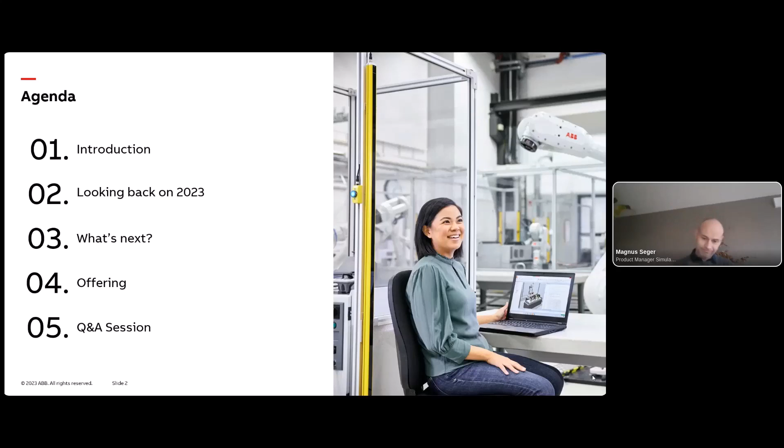So, first thing, introduction. I'll start with this one because this describes pretty well where we are today. We all know that the world is a bit upside down and a lot of crises are happening. There's a supply chain crisis, there could be a pandemic, and we work in different ways. We work worldwide spread, we sit home, we have to adapt our production equipment to meet all these new things. We have to be so flexible that we can switch from one product to another quite rapidly. And we have to be prepared for this.

We always talk about these high mix, low volume things. And of course, that's why robots come into play. Robots are ideal for this. And we're pretty good at robots, but we're even better at robot programming, how we can make them do the stuff that we actually want them to do. It makes no sense to go down using a joystick and teach the robot. The robot should produce. And that's where RobotStudio really makes the difference. We can really make sure that you get efficient by doing this.

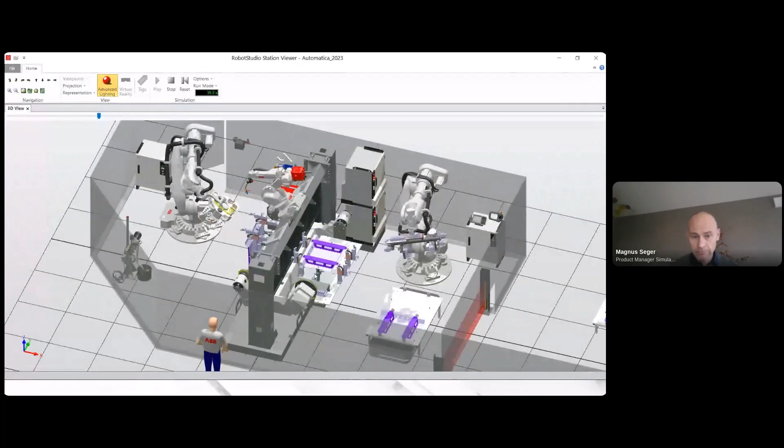And let me show you, this is really how we think about RobotStudio. The tool where you can program, you can simulate everything with precision, in detail. It's not only about the robot motion, it's also about the configuration, the handshake, the IOs, the safety. You spend more and more time doing safety configuration. But we also have the PLC, the MES SCADA system, and everything that an automation cell needs. And this is really what you can expect from RobotStudio.

Of course, you do the pre-studies, you do the offline programming, and what you see here is really what you get. That's the beauty, of course, and that's the best investment that you can do. But on the other hand, when you have an existing production, you don't want to stop that to make some adjustments, to tune or to optimize it. Instead, go to RobotStudio, do that, test everything while the robot is producing without disturbing the ongoing production, and then deploy these changes down to the robot.

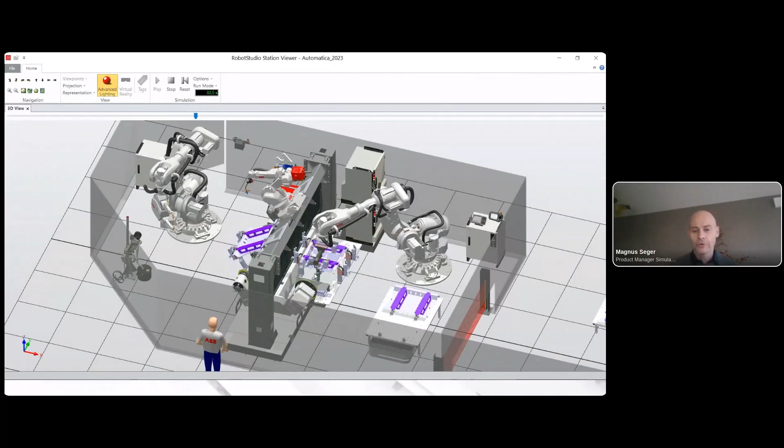And it's really all because of this. Our little guy here, the virtual robot controller, is why we can give you these types of guarantees, because this one, which is the true digital replica of the real robot software that runs down on the shop floor, guarantees that the things that you see here on the screen will be identical to the things that happen down at the shop floor. It's as simple as that. You can try everything, you test different configurations, and it will be the same. You can trust the result.

And it goes for the motion, the trajectories, the cycle time, the behavior, but also the errors. And you should really love to have the errors here, sitting with your PC, sipping your coffee in a warm office, not down next to the robot. Because there you make the bad calls, the bad decisions. You just want to get the robot working, not doing the right stuff. So I think that is the strength of RobotStudio, and I will come back to this over and over again, the virtual robot controller.

Okay, so that was pretty much the introduction. Our virtual controller is the DNA of RobotStudio, and that's what makes it different compared to other simulation software that might look good, but can you really trust them?

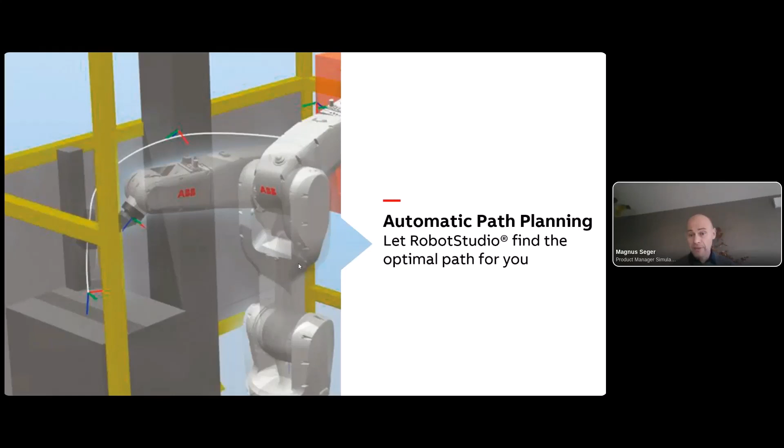We have released a lot of things during this year, some big things, and one of the top things, which is one of the biggest things that we released ever, is this automatic path planning. This is a fantastic thing that could really help you to create an optimal robot program.

In a tight, cluttered environment in an automation cell, it's really hard to create a program. You can do it, but are you really sure that's the optimal one? You create one, but is it the best? Instead, why not let RobotStudio do that for you? And it's just that easy. You just tell the starting point and position, and RobotStudio will find the optimal path for you.

And I will do some demos, of course. I've shown these before, but I think it's extremely visible to show what it's all about. In this case, we have this standard ABB cell. You can see how the robot moves. It moves kind of linear. That's how people think. Point to point, kind of jerky, stop positions, almost fine points, and move linear. And as you can see, this transportation took like 3.2 seconds.

When we took this cell and ran it in RobotStudio with automatic path planning, we got a completely different result and a completely different movement of the robot. By just using the automatic path planning, we could decrease the cycle time by 50%. And the beauty is when you have this highly time-efficient path, the energy consumption will also be reduced quite dramatically. So in this case, we reduce the cycle time by 50%, but we also reduce the energy consumption by up to 30%.

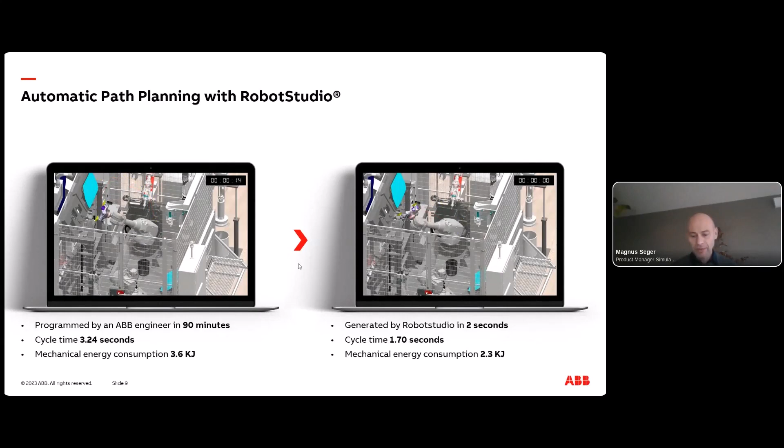And this transportation is one of 15 in this cell. So you can think about cutting that cycle time by half. There are a lot more parts that can be produced in this cell. So the beauty with this one is that you actually just tell the robot what to do, and RobotStudio will create a smooth, collision-free, singularity-free path for you.

And you really don't have to be an expert. It's that easy. Even if you're a new beginner in robotics, you will get the perfect optimal path. And the result will be smooth, with faster motion time. And thanks to this time-efficient path, the energy consumption will also be reduced.

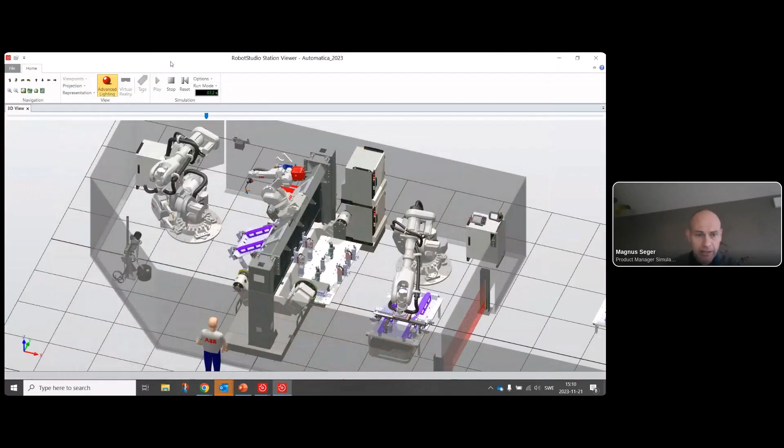So I will do a demo now. Enough talking. I will bring up a cell, not this one, another one, and show how easy and how powerful it is. So here we have a pick and place cell, a machine tending cell, where I will actually run this one because this is the baseline we'll start comparing against.

So the robot goes down to the bin, picks a part, and goes down to the tray. It's just the via points that I show now, so no picking whatsoever. And you can see we end up at like 5.2 seconds. And you can see here when I run it again, the robot moves kind of jerky. It's a lot of stop points, fine points, accelerate, stop. That's pretty much how a lot of robot programs are done today.

Instead, when using our new automatic path planning, we don't really go into details of how. We really tell what to do, not how. So let me show you how easy and how powerful it is. So I bring up this collision-free path, and we now just specify, instead of doing it in a robot program, we just set up the sequence.

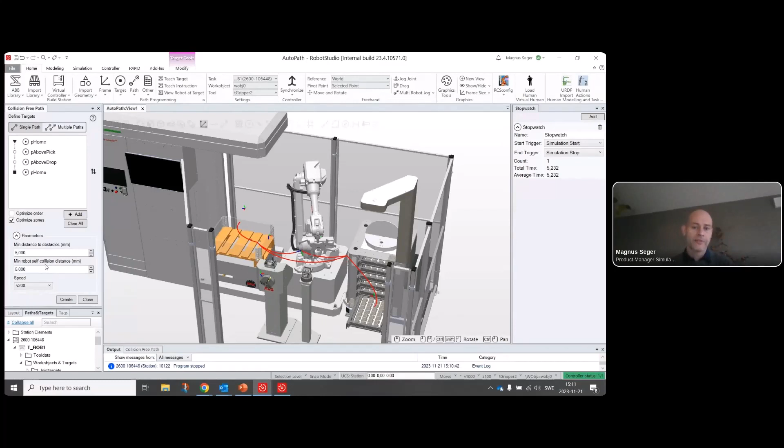So I just press add, and I say start from the home pose, go to the pick, go to the drop, and then go to the home pose again. And you can see we have created the sequence that the robot should do. I add some optimized zones. There are some other parameters you can work with, such as clearance to certain objects, and so forth. I will use the same speed as I had in the example shown before. That's the highest speed, so we can compare the cycle time between them.

And then I press create. So now we start calculating. Now we start finding this optimal path. And boom, we are done. So it's fast, it's efficient. And that is something that we'll spend a lot of time on during this year. A lot of things under the hood with automatic path planning to find a faster, better path in a shorter time.

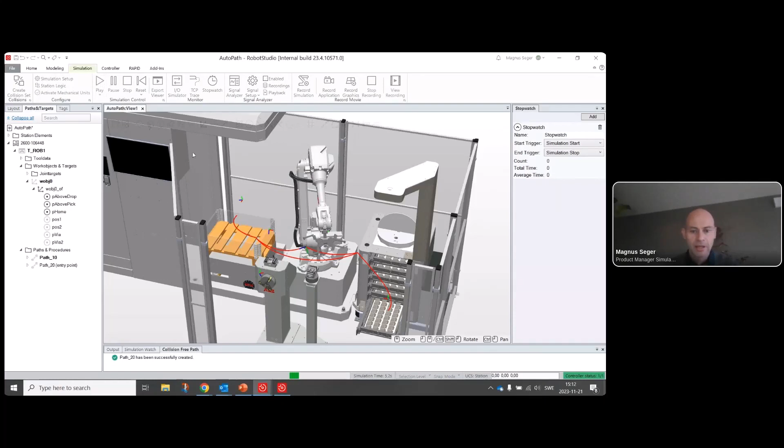And remember the cycle time that we had before, 5.2 seconds. I press play. And now you can see the robot takes a completely different track and ends up with 2.8 seconds instead. Almost a reduction of 50%. And you saw how fast, and I talked a lot in between, but you saw how fast you can create this program. And you also see how much smoother the robot moves.

So it's not only that we reduce the cycle time, we also reduce a little bit of the wear of the robot because it moves much smoother. And down here we can see we have brought up a new panel, the collision-free path output. I will come back to this one, but remember that one, because this is where you get some debug information later on as well when things don't really get what they expect or when you get collisions and so forth.

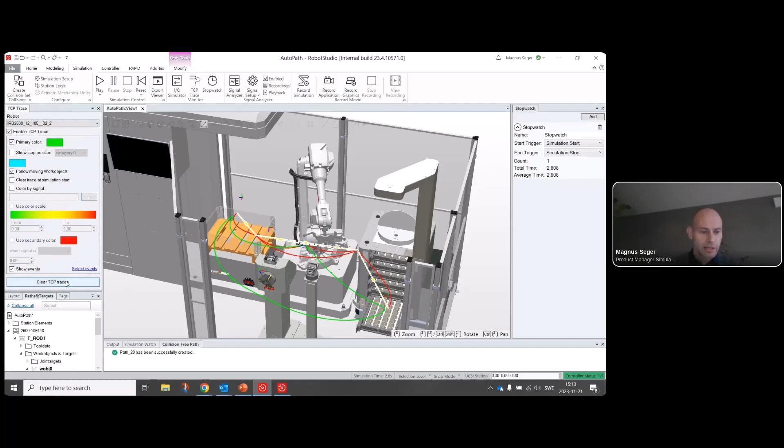Okay, so we reduced that pretty much by half. But let's have a look at the energy consumption as well. So I will activate the original path first. I will actually clear the traces and turn them up. So I will do it like this, and I will open up the signal analyzer. And first I will start with the signal setup, so we subscribe to the right signals.

I hope that you guys have actually used the signal analyzer. That's one of the most powerful things we have in RobotStudio, to be able to subscribe and search on all different types of signals that come from the robot to get some insights into how the robot behaves. In this case, I check the energy consumption. And I bring up the signal analyzer. I will just put it like this. And I press play. And now we run the original program.

So it moves, ends in 5.2 seconds with around 8,500 joules of consumption. Now I switch to the new one, press play on that. Instead, the robot swings around, ending up in 2.8 seconds and around 7,500 joules, meaning that we have decreased energy consumption by around 1,000 joules in this short time period without doing any specific optimization.

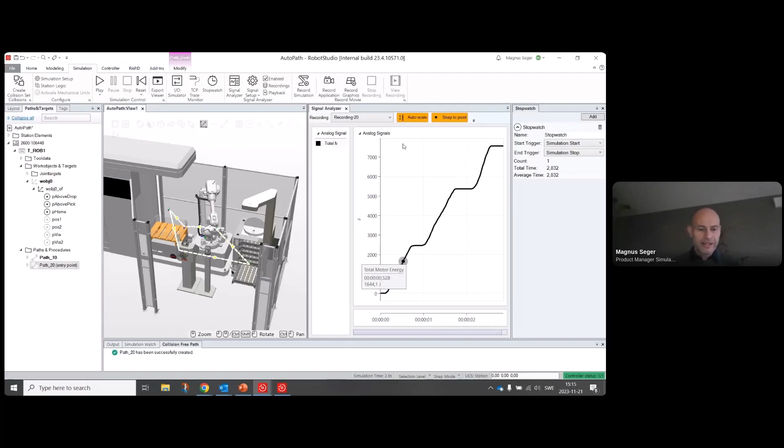So you see how easy, how powerful it is, and how amazing the result is when you see this collision-free or automatic path planning functionality. There are a few things, of course, that I just want to show you very quickly. The first thing is about this output that we've added. We have been working a lot with the collision geometries, because this is really the thing: how to create the collision geometries as effective as needed, and also keep them not so complex, so we can calculate as fast as possible with them.

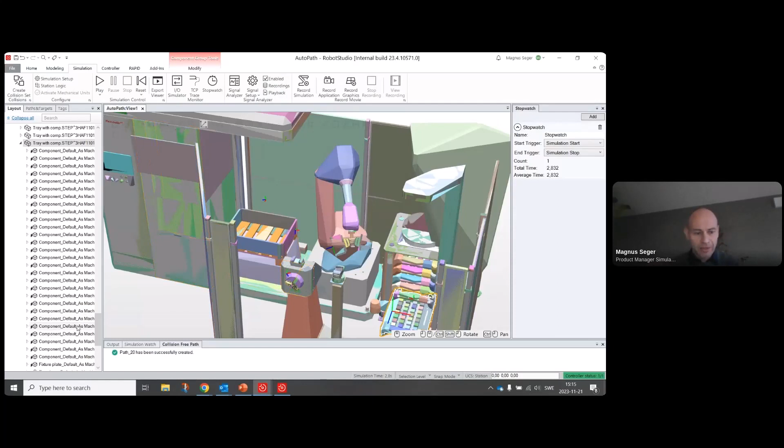But the thing is that you can change it, you can get some information, and you can also test it, because in some areas we try to keep coarse, not so accurate models to calculate, but in some areas you need more accuracy, and then you can switch to these different levels. And when you really need the preciseness, you have to customize, and you can really slice it into more precise convex hulls. So just have that in the back of your head, but the more interesting thing is of course the result, how easily you can cut the cycle time and the energy consumption.

Okay, switching back to the presentation, and I will just bring that up again. So that was one of the top things that we have released this year. Another extremely cool thing is that we brought virtual or digital robotics into the cloud. We released that almost exactly a year ago, end of December last year, and we've improved a lot and we're working a lot. And we see this still as one of the true enablers, one of the platforms for the future.

And as I said in the beginning, we are more and more working distributed. Our colleagues sit at home, some sit at the office, and you guys work in big companies and you have customers worldwide. We all need this possibility to collaborate smoother. And when we collaborate, there's also a risk of how to keep track of the different things happening to these projects, and that's about version control, about traceability. So RobotStudio Cloud enables this possibility to collaborate in a team, but also to keep track of all the different changes that people are making while working in the project.

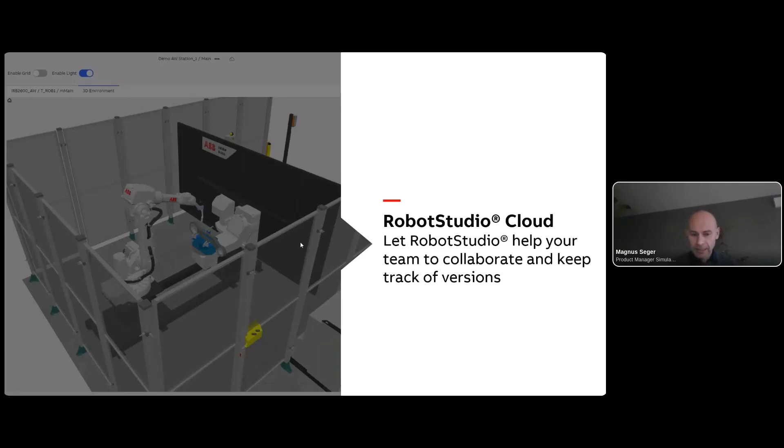And you can either decide if you want to use the desktop product, this one, or you can use the web-based application, RobotStudio Cloud, we call it. It really depends on the use case, but you pick the tools you're most familiar with and that solve the task best for you. Right now, a lot of people are using RobotStudio Cloud for version control. They sit in the desktop, but they store the project in the cloud, and the cloud handles keeping track of the different versions.

In the cloud, we have a Git repo, and we have created a powerful user interface on top of it, because version control can be kind of tricky to keep track of these different versions. And then, of course, I can invite others and they can pick up their web application.

We have pretty much the same mindset as Microsoft does, working with OneDrive and a desktop product. When I created this presentation, I did it in PowerPoint desktop. I uploaded it into SharePoint, same thing as we do now, and we can invite others to comment and work together with me, and they can use the web application or the desktop. Pretty much the same thing.

This is maybe the most boring slide, but we have to talk about it, because as soon as we talk about cloud, we talk about cybersecurity. From the very beginning, we designed it to be secure. That was the first thing we did. So we cover everything. The data that you upload into the cloud is personal. We don't share it with any third parties. We don't share it with ourselves. We don't see anything, and it's yours unless you invite someone else.

We're running on Microsoft Azure. It follows all the different standards, the latest security, and we run in Western Europe. And of course, everything's encrypted, everything is audited, and we follow all ABB certificates and procedures that are needed. Of course, GDPR compliant, etc. So we have covered it all for you, but it has to be there, right? So now I leave it, but just so you remember, we take this seriously, really.

Okay, some new cool things that we added during this year. And the first thing that I would like to mention is this possibility to share recordings via the cloud. You remember what we started with was that we had these station viewers first. These big executables that we did from RobotStudio desktop, where we could create a station viewer, a mini RobotStudio that you can send to others, and they can rotate around, which is super slick, super nice.

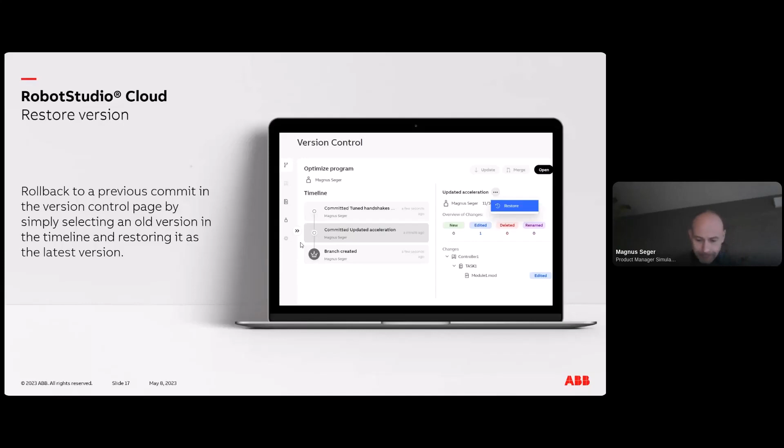And think about that when we move on to the real robots, etc., to be able to restore and roll back to a functional version. So a lot of good things. I will now do a little bit of a demo to show you. For you who haven't seen cloud, and for you who have seen it, we show some of the new cool stuff that we have introduced. Okay, let's jump into the demo mode.

And I have prepared a little bit of a station here. So this is a station that we have. I will select a simple arc-welding station, so I will just run it. And you can already see here that there are some differences. First of all, you can see that I am signed in as myself. And you can see that this station here is connected to the cloud. That means that the storage that I have here is on the cloud.

And you also see the possibility to push commits and push changes to that storage. So that's what we do. I will show you how easy it is. First of all, I will open up my cloud project, just bring that down, I'll open this one. And you can see all my products, and this is my personal space, unless I invite someone. You can see I'm logged in here, and I have my space, I have everything that's needed.

And this was the product that I was using. Here you will also find a lot of tutorials, documentation, etc., on how to use the products. Pretty handy. You see everything you need in the app. Okay, but let's go to this demo. You can see here we have this one, and I can look at the product.

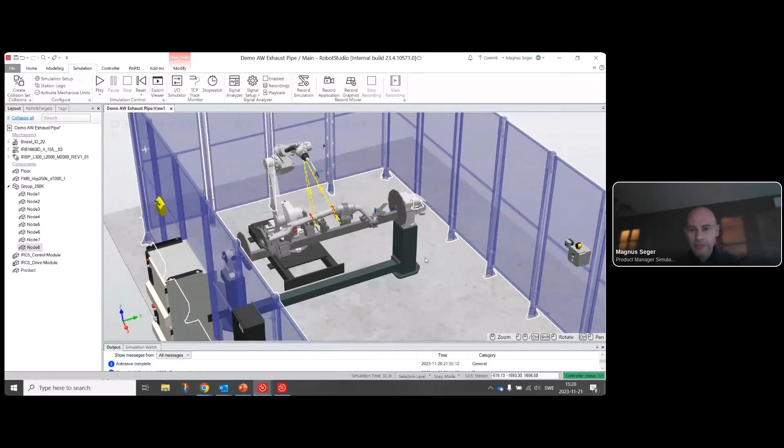I will not do this right now, but it's that simple. Of course, we can open it up, we can run it, and we can do certain things. I will head back to this one and show a little bit when we push changes and when we put them into the version control system, because you can do a lot of things.

Let me introduce a change. I've added a few changes to the Rapid program. I will also add a few things to the scene just to show. For example, I can put a pallet here, and I just press create. So I put the pallet, so we see something that is changing.

I save it, and now I would like to push these changes and store them into version control. So I do a review, and you can see here are my changes that have happened to the station environment, but you can also see you've changed a lot of things to the code. Here you get the source and the target, and you can compare these two versions.

You can see all the changes I have introduced to my program, a lot of cleanup, and I just have to make a comment: I did a cleanup and added a pallet, for example.

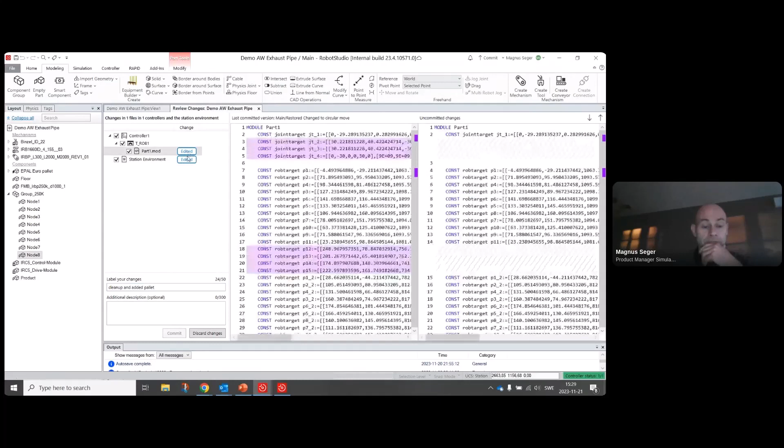That's pretty much it, you can be quite sure this is the thing that's working. I will do that, and now we can push these changes to make the commit. Added stuff, and I make a commit. So now we take the changes, push them up to the version control system, and we have them there.

Everybody working together in this project will get notified, they get synced with these changes if they want to. It takes a little bit of while, but this is how it works. It's kind of handy. This is how we collaborate, this is how we work in a project together. My network connection is a bit slow, but this is how it is.

I'll switch back. And you can see, once it's done, we'll get a new commit and we will get the latest and greatest changes. Of course, we can also open it up. Now I'm pushing up the changes, it's still ongoing, but I will do that just to give you a view of how it looks in this world and what you're capable of doing.

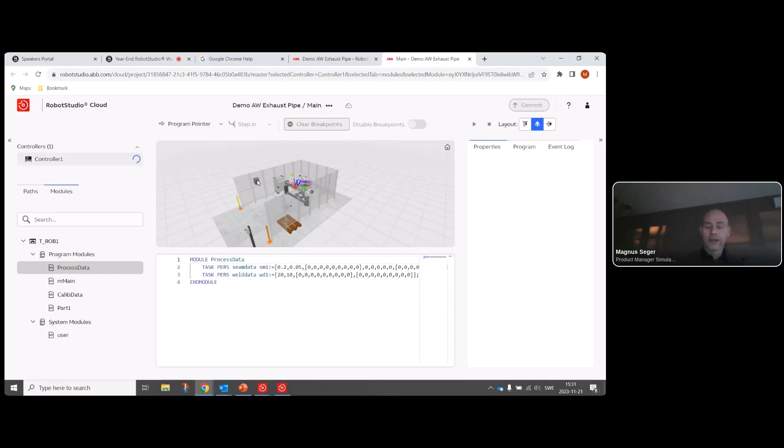You can see the changes, the commit, I will introduce the pallet there as well. The controller is now starting up as well. We have this virtual robot controller in the cloud that is starting up, and that means you can start to simulate, start to test, do everything that is really needed to be able to do this.

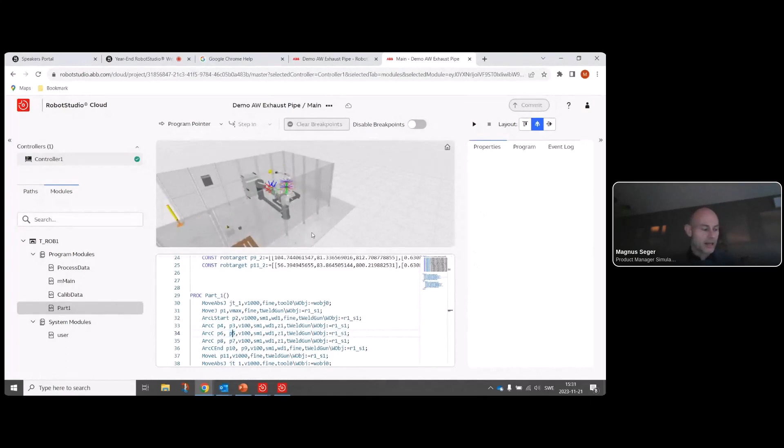Of course you can do changes here as well. You commit them, and when you do that, you will be notified as well down as a user. The controller started, it's starting up. You have the same thing: you can look at the program, you can do changes to your program, you can debug, you can run certain things, and really work in a streamlined way to adjust, work with your product, and tune it.

So I can simulate, I can go through it, I can debug, I can put in breakpoints, etc. A very handy, easy way to do it, and you don't have to have anything installed, you're just running this in the web browser.

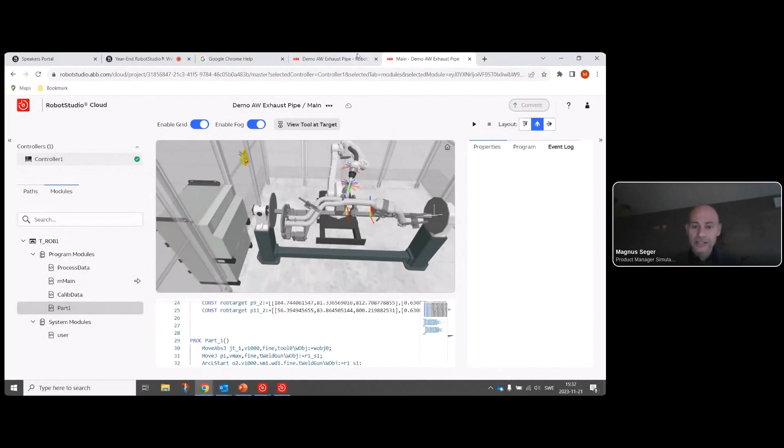Once you're done, you can make some changes, put in some commits, and sync them to everybody. This is one way to keep track of all the changes in your automation product. So this is the commit I did, and you saw I changed a few things. Let's head back to where it was.

Let's close this one. The last thing I'd like to show in the cloud is sharing recordings. We have this simulation, and now there's a new feature called export viewer. I'll press this and store the recording in my cloud storage, and also create a link. This is pretty much a station viewer that we have.

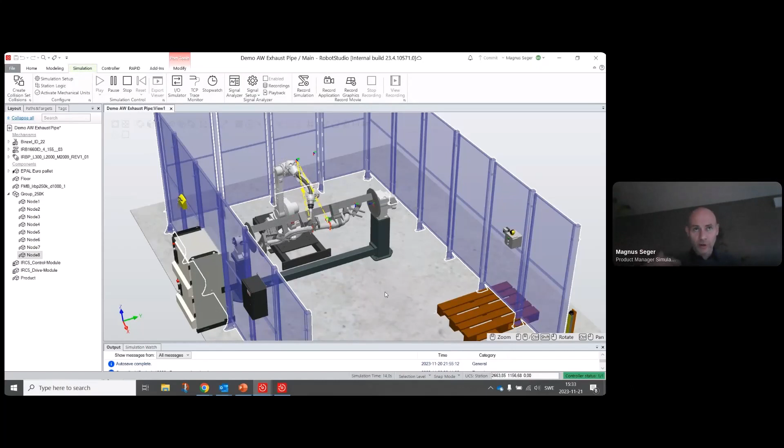Pretty much the same thought process behind this one. So now we run it, we record everything, and once done, we can push that up to the cloud storage. Okay, so now it's done, soon.

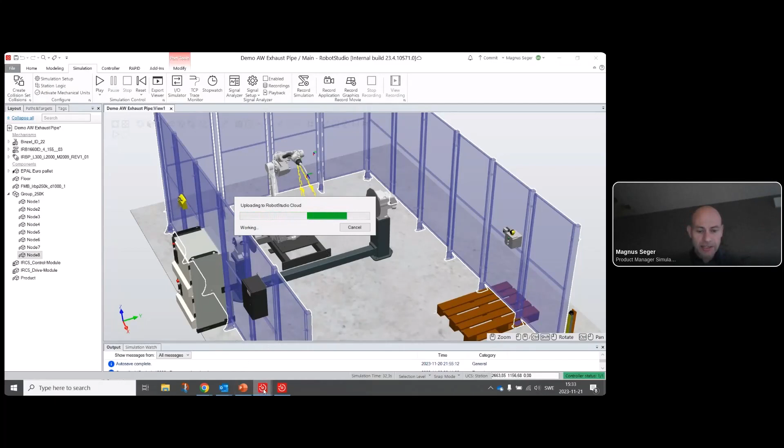I'm creating the viewer, uploading it, storing it in the cloud, and I'll jump to my cloud here. I have to log in again, and you can see here it is. This link is something you can share with others — something you can pick up on a phone, send and distribute to anyone.

You don't really have to have any license or anything like that, so this is pretty straightforward. Just export this viewer, it's stored in the cloud, and you can take this link and send or email it or hand it out to others to give a snapshot of your proposal. Kind of sweet.

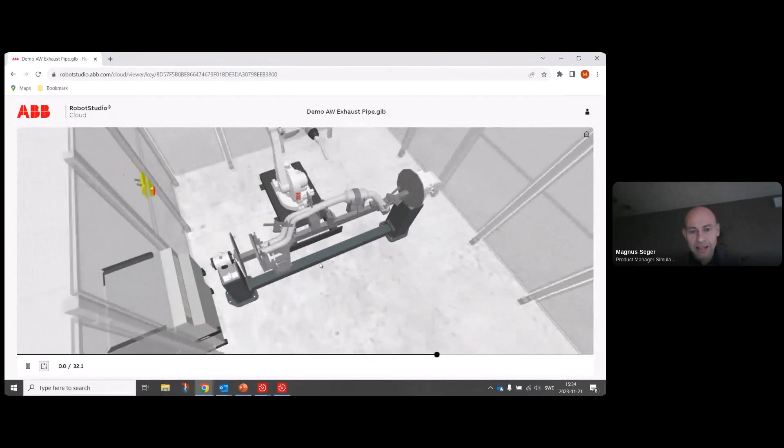There's a lot of good things happening with the cloud, and we're adding more and more capabilities and functionalities into it. We are expanding our ecosystem in this direction. And here you can email it and send it away. So I'll just close this and switch back to my presentation.

These were the two big things we've released so far, and we're continuously working on them. We've done a bunch of other things too, but these were the two main highlights I wanted to share with you. Now let's jump into the next release, which will happen in a month or so, and I'd really love to show you what's next.

You remember I showed you the autopath planning, the collision-free feature. I said we have this output debug window, and now you can see we've included more information into it, because before it was troublesome to figure out where the collisions were happening. We just said there's a collision between this and that — but where is it? Especially you had to see the convex hulls, the swept volume around it, to be able to see that.

But now you can see down here this output window where you can actually highlight, and the robot will jump to where the collision is happening and between which objects, and we outline which part it is. Either you have to make the collision geometry more precise and accurate, or the targets are actually in collision. So this is some sort of guidance to guide you.

This is something I work quite a lot with, together with optimization, speeding up the process, etc. But I can guarantee much more things will come with this automatic path planning during next year. So that was one thing.

And then, of course, we have a bunch of small things that are extremely valuable that we've added. I just cherry-picked a few worth mentioning. First, we've included a search bar in the browser so you can actually find objects in the station — targets or objects that you can search by name.

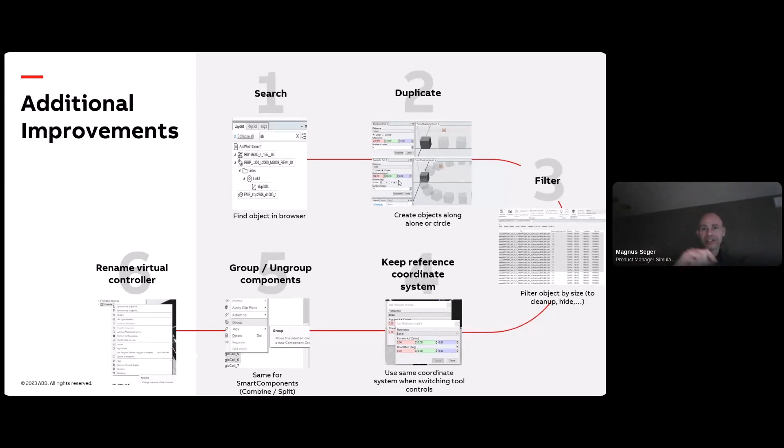Number 4 is my favorite: we're now keeping the reference coordinate system. I've been talking with a lot of people, and they say this is one of the most annoying things we have in RobotStudio. Now we have listened to you guys. We are keeping the reference coordinate system when you're switching selection from one to another. For example, if you have set position and you go from one object to another, or from one target to part, we keep the selections and the reference coordinates we have, so we don't switch to default. Good, finally we have done it.

The 5th thing I'd like to mention is the possibility to group or ungroup components, so you can easily structure a lot of components in a cell by grouping them, but also split them to ungroup, to have a better view, and bring them out and group them accordingly. The same goes for smart components, but there we call it combine and split, so you can group logical components etc. in a better way.

And then we have the possibility to rename a virtual controller, or rename the system actually. This has been kind of challenging - when you run a system from layout, you get a name, and then it says you need to really change it. It's not that easy, you really have to create a new system and make a backup and restore that into it - extremely challenging. But now you can rename it. I will soon demonstrate how easy it is.

And this was just some parts that I just brought up to you, which could hopefully be extremely useful for you guys.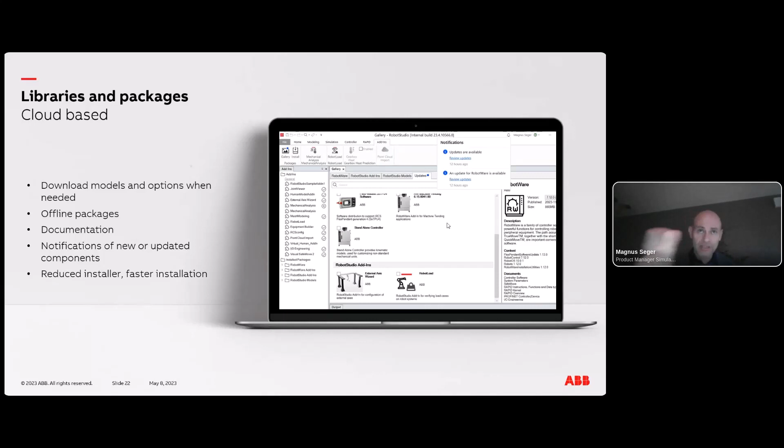Now, one of the big things we've finally added is a new, solid, very powerful gizmo. I mean, you remember we had our little gizmo for a long, long time, but now we finally have one that is worth a tool like this. We've had it for cloud for a while, and now we brought it down to the desktop as well.

Here you easily can manipulate and change the view and scene of your layout. I will do a demo just to show how powerful and how easy it is to use this one. I really love it. This is something we should have had a long, long time ago, but now it's here. So let me jump into that and show you how easy it is to work with it.

So now we are on the 23.4 branch, and there are some new things, and you can see right now I've already started selecting the tool and the gizmo. And you can see we have changed it a bit up here. It's not exactly how it will look. We are still working on the final part, but pretty much the thing is that we have a reference coordinate system and also the pivot point we should rotate around, or what the attachment or selection should be.

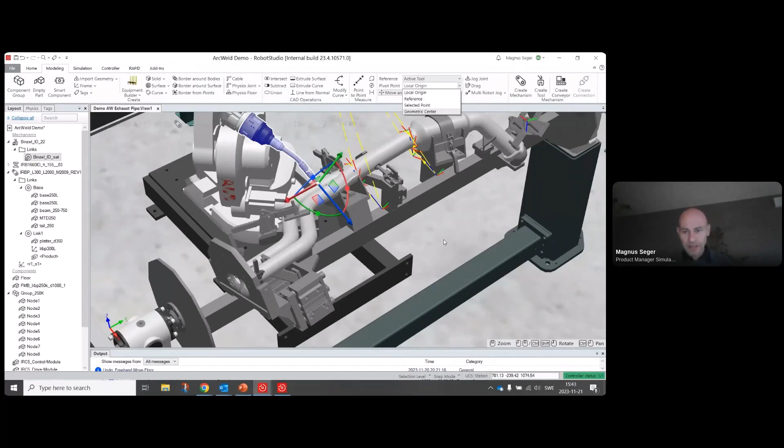So it could be the local origin, it could be the reference coordinate system, a selected point where I click, or the gravity or geometrical center of that object to be able to move this. So I'll try to go through them quite quickly so you get some sort of feeling of where it is. So let me show you here.

So of course you can now drag along the line, and you can see we have a little panel that pops up. So here you can type in, oh, maybe a little bit too much, and you can just adjust it if you want to be more precise, if you don't want to drag it, and you can also select if you want it relative to start or relative to your reference position.

You can be more precise if you press down some keys for fine-tuning, and they will be popping out here. Right now you don't see it, but it will soon be visible here as well when you work in this context, what keys you should use to do smaller increments or fine-tune them. And you can see the gizmo is rescaling, and you can also quite easily work precisely.

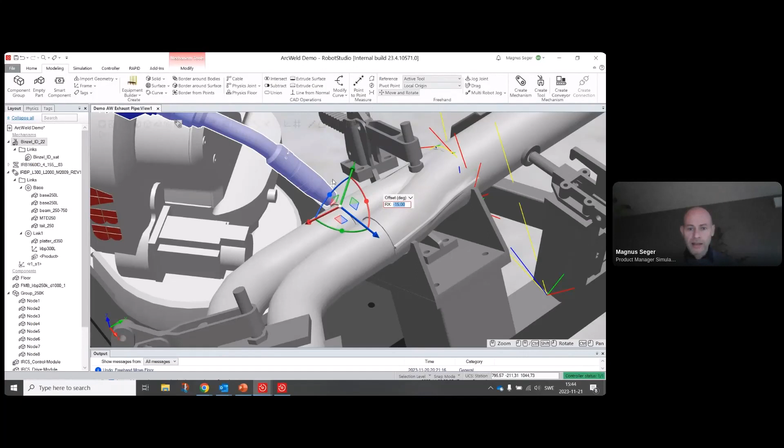And now you see I do some reorientation on the tool. I would say, when I weld, I would like to always have this by 15, and we jump around like this. And right now I'm using the reference as active tool, but you can see if I switch to world, of course, the reference coordinate system will adapt accordingly. Or if I go to the active work object, which is placed here, then of course it will be like that.

So you can see it's much easier to work and to manipulate both the robot and the scene. And you have less need of all these set position and rotate dialogues, which we used before. I would say the gizmo I had was good to coarsely put things into the right position, but now we can do really fine manipulation. So this is really handy. So that was about the jogging.

Now I will switch to the target. I think I have this one here, and you can see I select this one using the active work object, or I can choose the local one. And in the same way, I can adjust it. And here we have these planes. So here you can actually offset things in a certain plane. So if I click on this one, you can see it will be in the XZ plane.

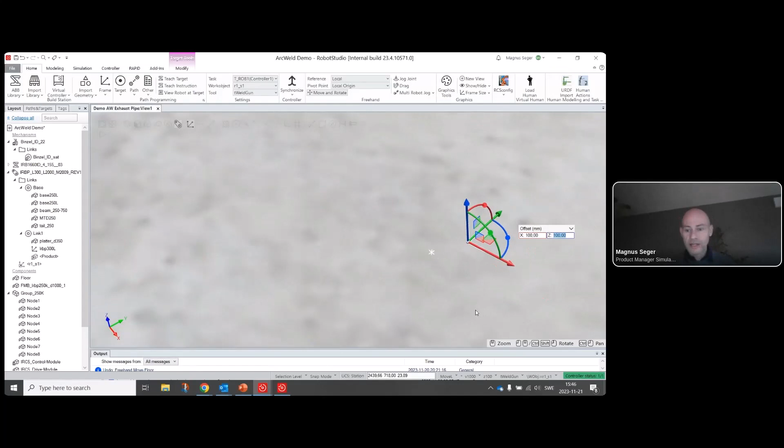So let's say I would like to shift it now 100 millimeters here. And then set the 100, and you can see I can easily manipulate things by offsetting. So I think this is really handy, really nice, and you really soon get used to how it works. Okay.

The last thing I would like to show in this part is how it works with some parts. In this case, I'd like to have a selected point. So actually, the gizmo jumps to the place where you click. So you can move it, you can rotate it, and right now I have the local reference system. I can also do multiple movement, something that we couldn't do before. So now we can manipulate multiple objects.

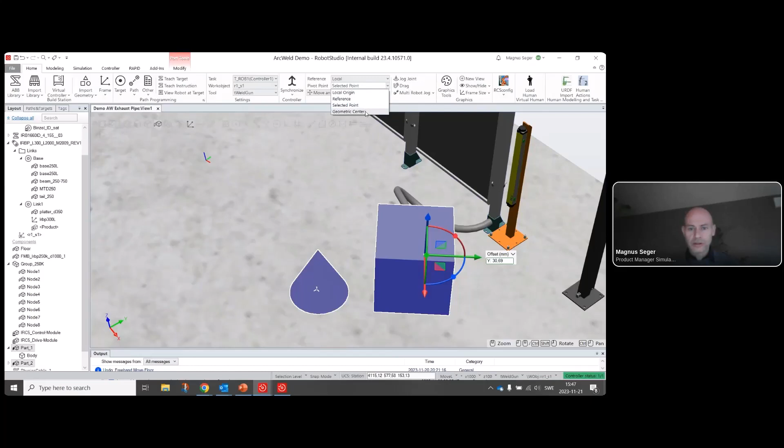So this is kind of cool, and if I switch to the geometrical center, it will jump down to here, and then you can see if I rotate, it's kind of clear, it rotates around the gravity center of this object. So this is something you can play around with.

I hope that you will find it extremely useful, and just let us know. We are very curious to hear your feedback.

So that was the new gizmo. I have a few more things that I would like to share. Let's see how time is. Yeah, we still have a few minutes, and there are two things that I would like to share. The first thing is about the replacement of the robot.

The replace robot is something that we've been lacking, and that's been on a wish list for a long time. You do your proposal, you do your layouting, but then you realize, shit, I picked the wrong robot. I need one with a bigger payload, one with a bigger reach. Before, it was kind of challenging. You had to really recreate the system to get back to where you were.

But we keep everything. We keep the configuration, we keep the safety, we keep the attachment, the base frame, everything is the same. We just switch the manipulator of the system. So you can easily swap and test different proposals and layouts with the replace robot. It has been there for a release or two, but we have enhanced it a bit. So this is something extremely cool and extremely useful.

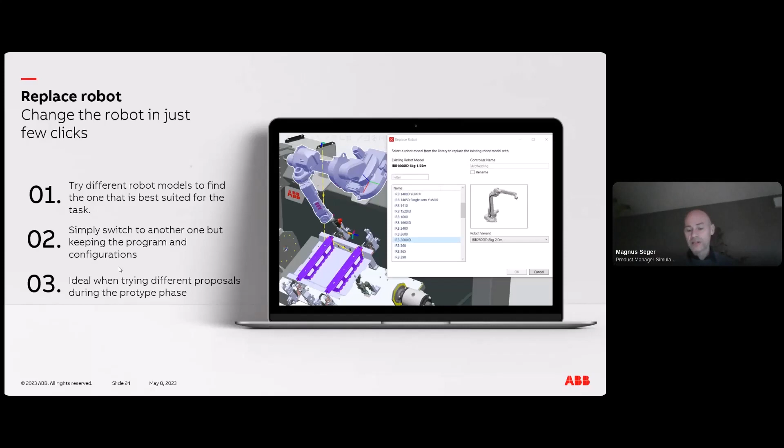And then we have this stress estimation, because this is something that we also find extremely useful, to be able to visualize where the stress is happening in a path to the robot. When you run a robot program, certain movements and certain orientations, etc., cause more stress. And some of that stress will of course reduce the life length of the robot. But here you will get some insights to really dig in and find where in the program what is causing the stress. So I will make a super quick demo, the last one for today, just to visualize where it is,

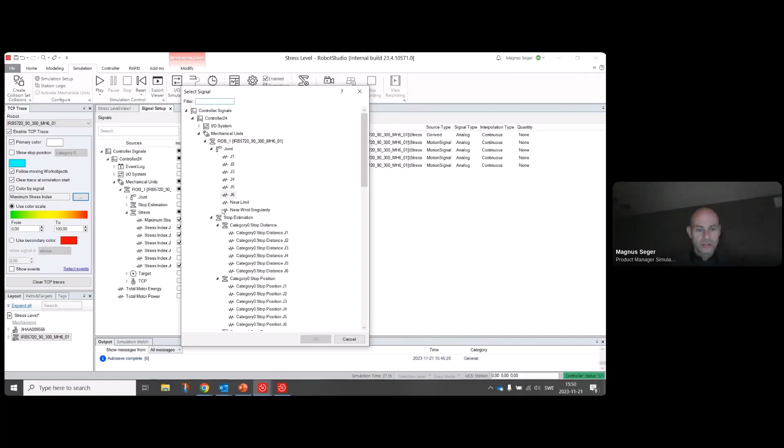and just to show you that we now have a lot of other signals you can turn on, the maximum stress, for example. We also included this into the TCP trace, so you can see I can select this one in the trace. I/O system, let me see, sorry, stop, and we have the stress. So we've set up everything, I press play, and now you see the different stress levels that are happening to the robot, and you can see it switches between green and yellow, really depending on how much reorientation, etc., is happening to the robot.

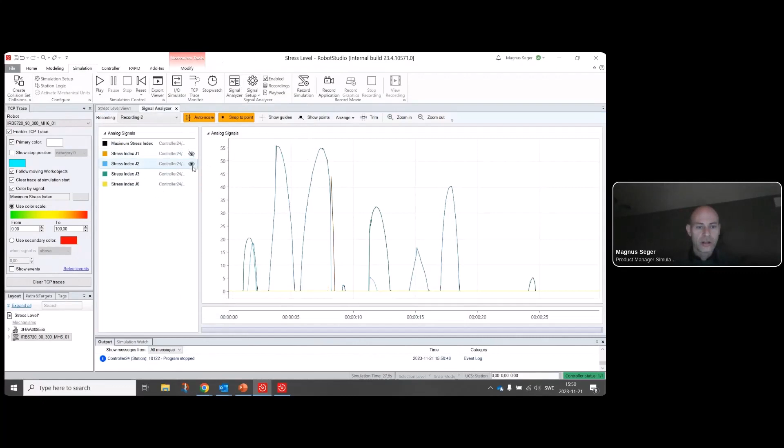This is only valid for OmniCore and the 57 and 67 new generation of robots. Okay, and that's it. So now you can see it was pretty much green. I can go to the signal analyzer. I can take a look at the different things. I forgot to add, I will actually include this one, so we can do that in the target. I will rerun, and we will see all these types of things, you can see there are some peaks causing a bit of stress to the robot program.

And if you want to drill down, you can just go into the signal analyzer, click on a position, and get these insights, what exactly is happening, what exactly is causing the stress. So the simulation is done. I can zoom in. I can see there are a few peaks. To get some of the details, I just select this path and jump to the program. We open up the RAPID editor and you can see, we run with vmax and fine. And even if I reduce the acceleration, you can see there are some stress causes.

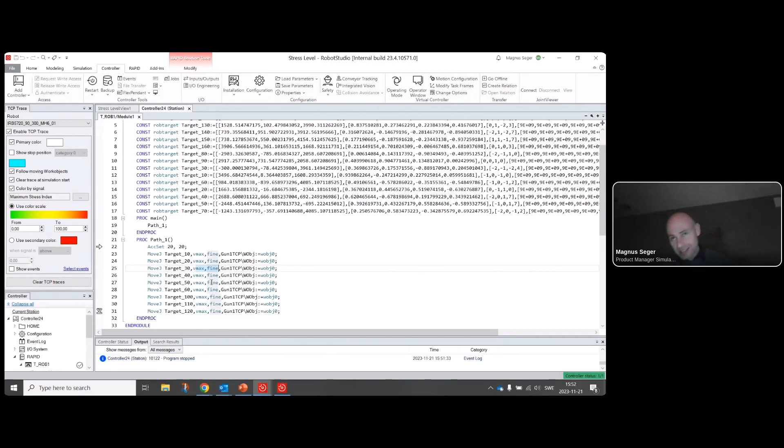But if you run with full speed with stop positions, of course, there'll be a lot of acceleration and deceleration causing a lot of stress to the robot. So this is something that we included, and it could be especially interesting to really jump into the details of your robot program and how it affects your robot's behavior and potentially the life length of the robot.

A little bit of a rush in the end, but that's no problem.

So a little bit to summarize. I think we brought in some really cool, nice things that I really would like you to try out. The gizmo, the stress level visualization, the possibility to replace the robot, just to select and replace it. And then, of course, we've done a lot of things to the automatic path planning parts.

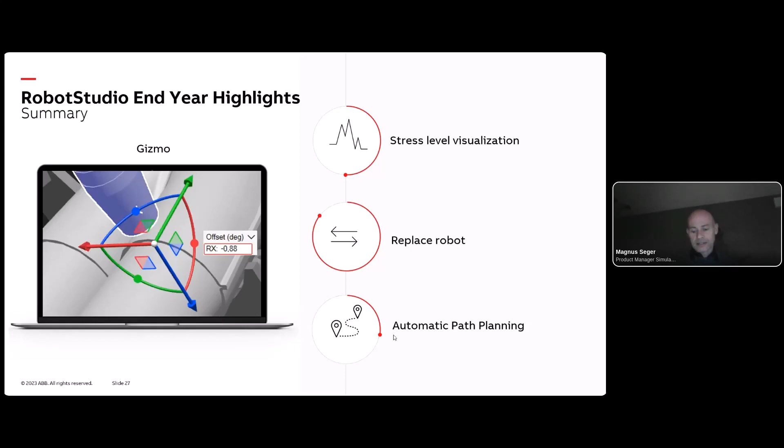And that's pretty much it. You all know about this. We have a full package. We have a premium license that also includes the desktop and the cloud. That is part. We also have an AR viewer for free that you can just download from the Google stores or app stores. And we have a few sets of different licenses.

We have the freemium versions where you can configure the robot and program it to get it started. But then, of course, we have the premium license, and pretty much everything that you have seen right now is part of the premium license.

And for you who haven't used RobotStudio, you can try it out by using our trial license. You can have the full functionality for 30 days, try everything. And even the cloud has a tryout period as well that you can use. So, go to our webpage, search for RobotStudio, download, and start using it and start playing around with it.

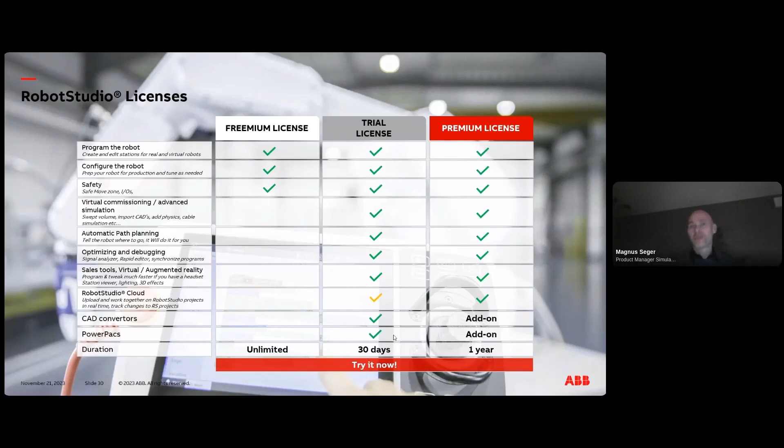I realize that we only have 5 minutes left, but now we open the doors for some Q&As, and I head back to you, Arwid, and there are some questions that have popped up during the session. Yes, we had quite a few questions come in, and it's great to see that our participants are very interested in this. So we've had everything from very small technical and detailed questions to more general questions. So let's not waste any time. Let's jump straight in here, and I'll try to do them in some kind of order.

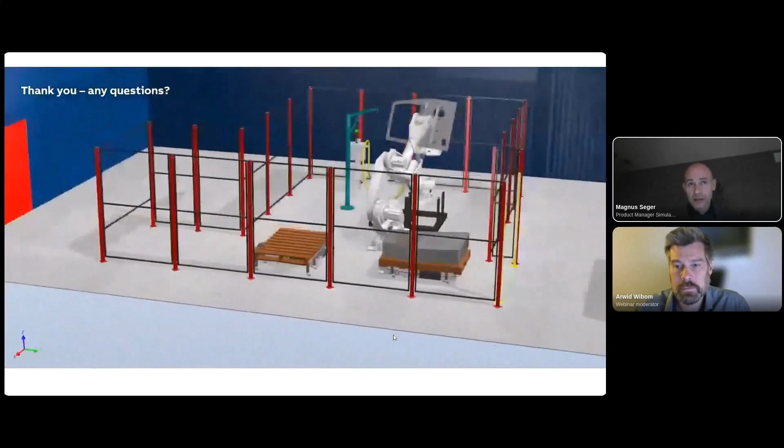One of the first ones that came in: would it be possible to create a collision-free path with robtargets instead of jointtargets? Yes. This is one of the things that we're working with right now, to be able to purely create Cartesian targets or ROB targets. The problem, though, is that you cannot guarantee singularity freeness in that sense.

But we think about a bit of a combination that you sometimes have when you have the big transportation, but when it comes to the process points, you will have Cartesian targets, some offsets and some approach and departure, but we can also create completely Cartesian positions as well. So yes, that will come. Perfect. Thank you, Magnus.

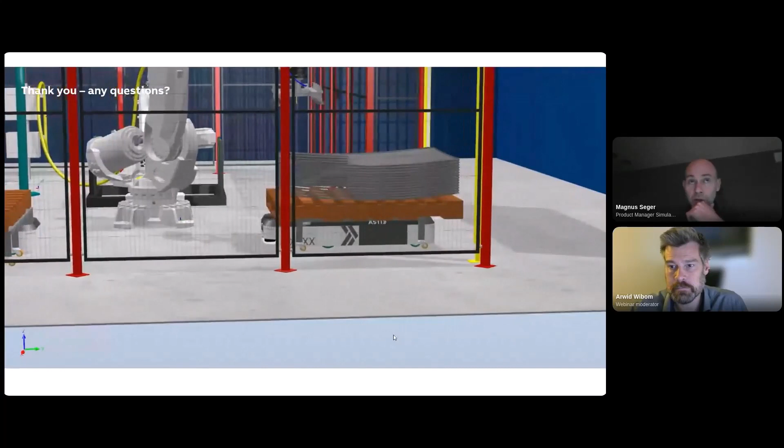Moving along, will it work to commit layout changes from a branch, or will it only work from the master? No, it will work for both. So you can push both robot changes or program changes, but also layout or scene changes as well, from both master and the different branches. So that will work. Yes.

Perfect. I think you answered this one, but just to clarify, what RobotStudio version has the auto path planning? We have had it during the entire year. So all the 23 versions are equipped with auto path planning, but you should always go for the latest one. 23.4 will have the best one. We have enhanced even more things, but yes, it's included. So look in the path, create collision-free path. That's where you find it. Otherwise, just upgrade and you will get it. Perfect.

Is there any UDT to handshake with the AB PLC other than EDS files of Ethernet IP? Oh, that was a tricky one. I think that is beyond my knowledge, to be honest. What we have in terms of PLCs is that we can connect to Siemens Simit and we can connect via OPC UA. In RobotStudio, we have all of these different drivers that connect to some native protocols, and we can exchange the tags or the symbols to do this.

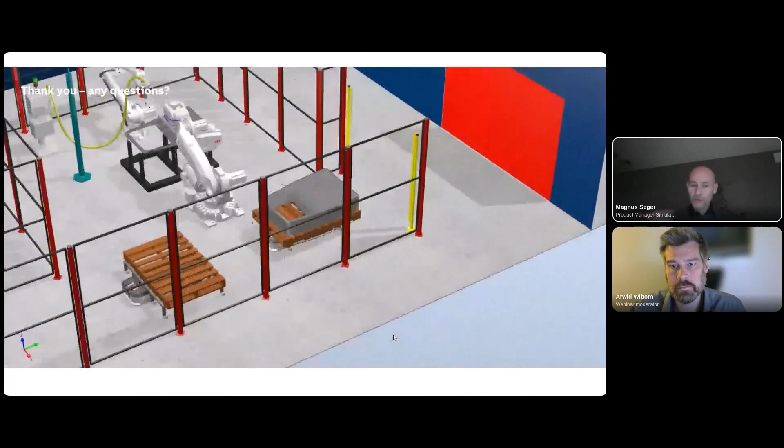But when it comes to the Ethernet IP and how that is connected, I'm not sure. But you cannot connect directly via Ethernet IP to the robot controller or a virtual robot controller. You have to go through one of these drivers inside RobotStudio for OPC UA, OPC, or Simit. So I'm not really sure if that answered it, but maybe we can deep dive, and maybe I need some help from some colleagues to explain that as well. We'll make a note of it and make sure that we reach out to the person who asked this question.

Perfect. And then there's a question about the 500 megabyte limitation for opening up projects. Will it be removed? Yeah, we are increasing both the storage and the size of uploading right now. So first we have 5 gigabytes of storage. This one will be much more expanded, but we will also open up the storage size, and we also have some other limitations that certain parts cannot be bigger and so on. So that will be a change for next year, that we will increase that.

And I know especially when we work with version control, when you sit on desktop and you have huge projects and you want to have the cloud as a version control system, we need to have that capability of storing bigger files. So yes, it will come.

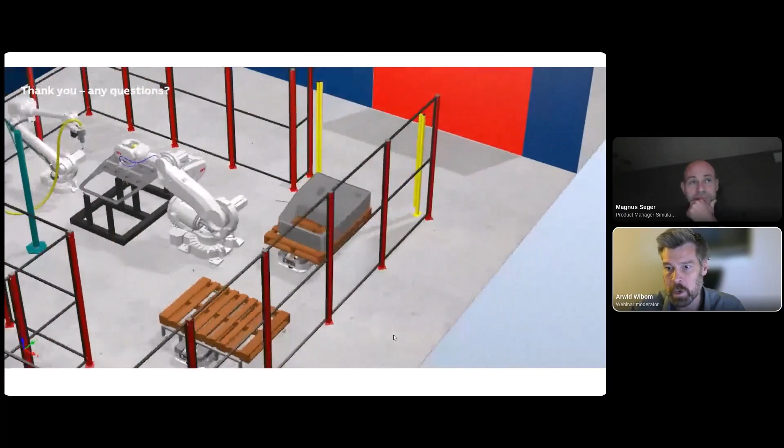Thank you. Thanks for the presentation, Magnus. The new gizmo looks awesome. A few questions. When will you add support for simulating AMRs, AGVs, the ASTI movements?

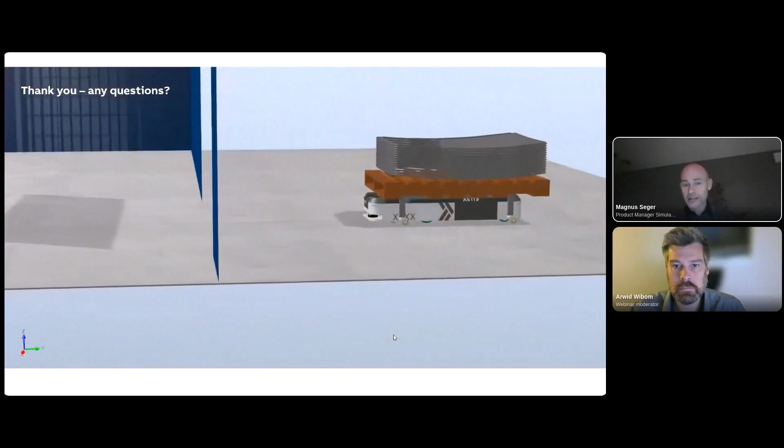That's a good one. I mean, there are two different levels, I would say. First, of course, when you think about the AMRs, it's really about how you calculate or schedule and look into the fleet, etc. The fleet management, or let's say the logistics or the flow. This will not be in RobotStudio as we see it right now, to have the overall logistics of the cell or the material flow happening. So how many AGVs, etc. you need to do this.

So that will not be, but it might be more interesting how to communicate with these types of tools to be able to exchange this data. So that's one part. But then of course, what you actually see more on the screen, where you have AGVs moving into a specific cell, and also what we saw in the beginning where I had some AMRs and AGVs, that is of course closer to what RobotStudio is, when you actually have material brought in or use AGVs or AMRs as fixtures, etc.

There, of course, you can already program a lot of things today, but in a quite clumsy, hard way. So yes, we are really looking into this. I can't say really when, but just to give you the scope or the context of what we're looking into, I would say it's more on that level, to see how they interact in Studio together with the robots, using the basic functionality or a bit more extended functionality than what it is today. So there will be a lot more things there, but I can't really say when and how. But we're looking into it for sure.

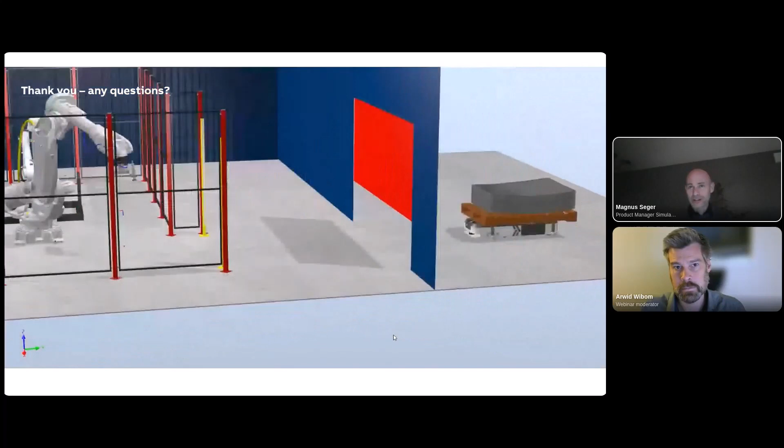I would say soon, but I've said for a while now that it should be soon. But it is really my belief that all network licenses should include cloud licenses. So we work heavily on this one, but it's a bit of an infrastructure issue, unfortunately, with the different IT systems within ABB causing some of the issues. But it will come. It's a must.

And I can tell you this: if people who have network or partner licenses are interested in using cloud, we will give you cloud licenses for free that you can test on top of it. So you can still use a network license, and you can add cloud licenses that are personal. A lot of you have already done that to get access to it. So please contact us, or your local business unit that you work with, and we will provide you with a cloud license so you can start working with it.

And soon we'll solve it in a generic way, but that's like an intermediate step. So please don't hesitate to contact us. We'll solve it for you. Okay? But soon it will come. Yep. Soon is a very, very good word to use. Exactly. It's very imprecise in some way.

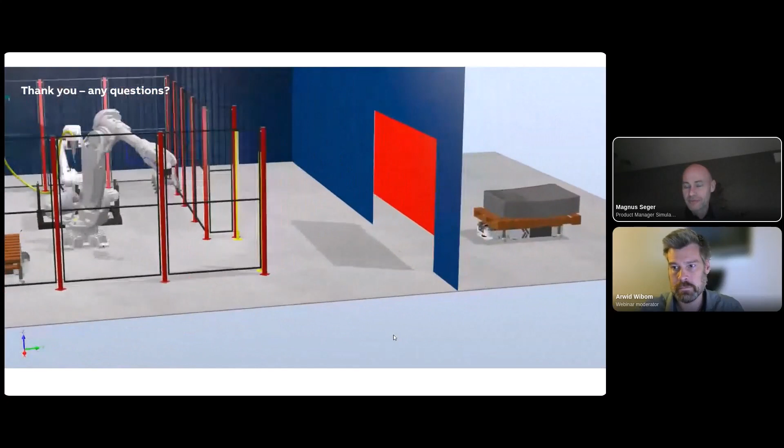So next question, will you add support to export stations to the USD format? Interesting. There's a lot of discussion about that. We have no plans right now, but I've seen a few interesting third-party tools that are already doing that for RobotStudio. So there are a few things that are actually looking very promising. If you Google a bit, you will find some drivers already on top of RobotStudio that are capable of doing it.

So there are possibilities, but we are looking into that as well to see if that will be one of the output formats or input formats or interop formats for RobotStudio. But there are already possibilities, I would say, to do it.

Great, thank you. We had a question about what unit or dimensions the stress indications are in. Interesting. It's just an index, so it's between 0 and 100. And the numbers that you see are pretty much in comparison to a normal standard cycle. A normal standard cycle is somewhere in the middle, and if it's greener, it's less stress than that standard cycle, and of course 100 is way beyond that. So it's just an indication of how hard you're running the robot compared to this, let's say, standard or normal cycle.

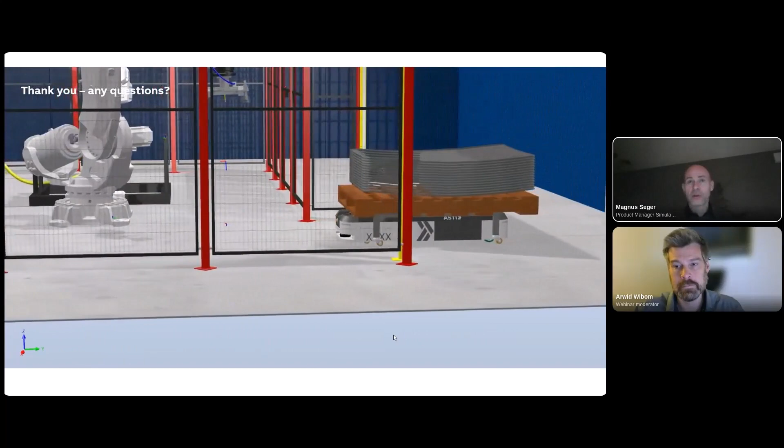But I would just emphasize, it's only for OmniCore. It's only for the new, what we call the large robots, 57X, 67X robots that we support so far for the compact gearboxes. That you can compare, but that's just a level or indication of the stress that it is put to. Yeah, perhaps you should come up with a unit name for it. It's nothing, it's just an index.

So you plan to introduce more plans, maybe per package? That would be fun. No, but of course, I usually show a lot of the generic things in RobotStudio, but of course we would like to have some more application things on top of it, because the robots are actually doing something. It's not that we're just running pure naked robots with no applications. So we have these PowerPacs on top that support the different packages or applications. Maybe it was not that question, but maybe you have to rephrase it.

But there are also some application packages that we are looking into to add on top of it. But now I realized you asked if there were more packages as licenses, I guess, on RobotStudio. And yes, we are looking into that as well. A lot of things we're looking into, I say that. But this is something where we see if we can split the product into different levels of packages. Right now we have the free and we have the premium.

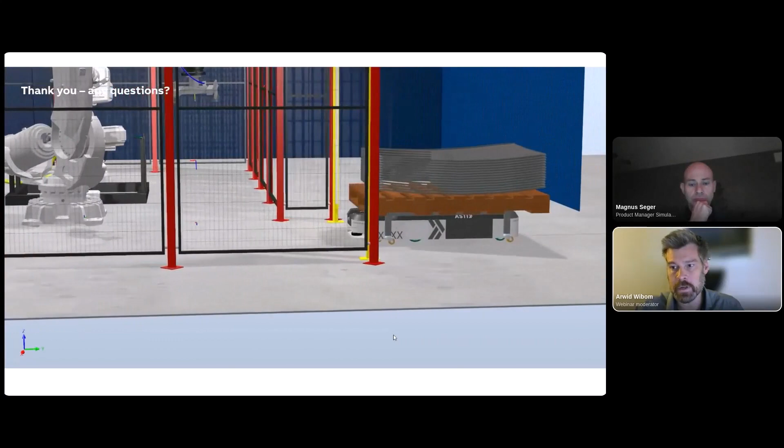Are cloud packages available for free for universities, like the 100 free licenses of RobotStudio? No, it's not. It's not part of the school package. It's only part of the premium package so far. There is a tryout version that you can use for schools, but it's not part of the school package as is. So no, unfortunately not.

Let's move along here, trying to keep track of which we've done. Will there be a possibility to export the top view of a cell to a 2D layout with lines that are not visible from the top hidden? Yeah, for hidden line removal, we've already done a few things, and you can already export some of them into DWG with removal of some lines. So we added a few things already into the product.

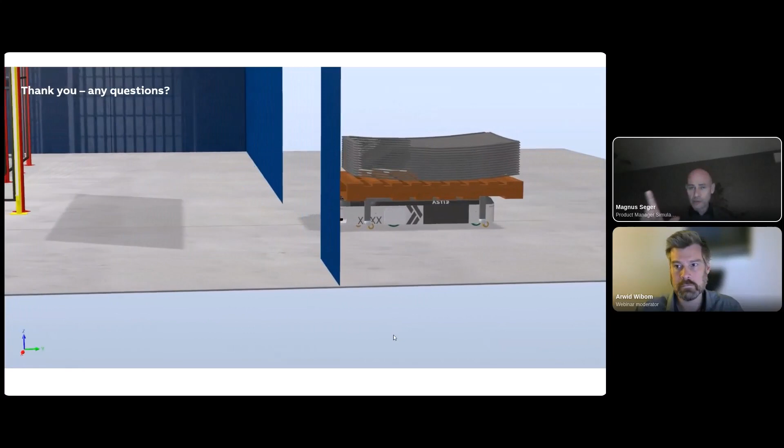So please test the new version that comes out now and see if it's needed. I know we have a few other features in the pipeline that address this one, but we have taken a few steps already in this direction. So please try that out in the next upcoming version to see if it suits your needs.

Great, thank you. Is there a plan to implement the possibility to edit RAPID in the editor without write access, and only require write access when trying to apply changes? Interesting. And then we talk, of course, about towards the real robot controller. Yes.

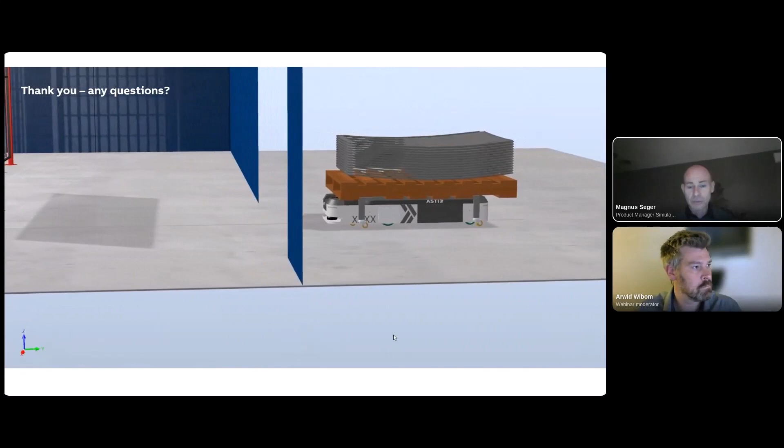No, we have not really thought of that, but we are thinking a lot about how to push and deploy changes to the robot controller. That'd be an interesting thought we might need to revisit. Why should you have a lengthy mastership of the controller when typing, rather than only when you actually push down the changes? There could be some things about parsing, syntax, and checks, but I'll leave that to the dev guys who are the real experts. I think it's a good thought, so I'll keep that in mind.

Great. Any chance to bring back linear jog robot instead of combined with move? I constantly see myself dragging a robot or other objects.

Exactly, so I hope you saw the gizmo—that's one of the steps we've taken. When we did the merge, it was like a transition. Now we understand why we moved towards combining things into this gizmo. You can see it's way more intuitive and way easier to understand how you move objects when jogging or moving them.

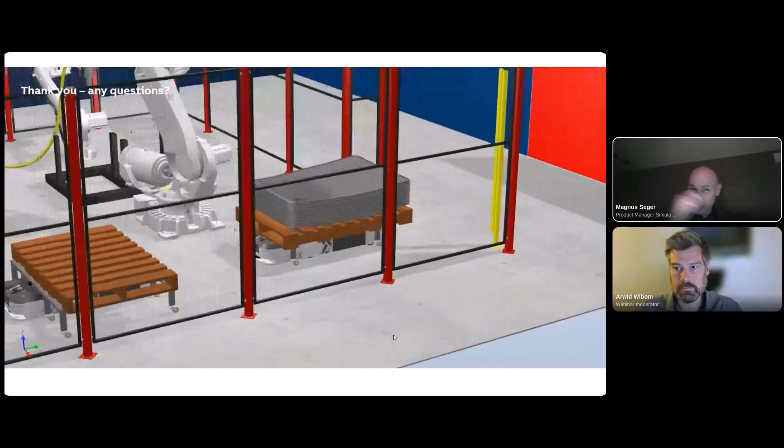But of course, it's still possible you might move the robot accidentally. So we will include the ability to lock objects so you don't accidentally move them—for example, a robot could be locked by default to its position. We're including the possibility to lock certain things, and also make the selection quite visible so you don't accidentally jog or reorient the robot. So we have a clear visualization of the selected objects.

So yes, there are a lot of things, but testing the gizmo, it's way more efficient than it was before.

Makes sense. So there's a question: is there any plan to provide access to the collision-free path calculation function in the virtual controller, or is this functionality only available in RobotStudio?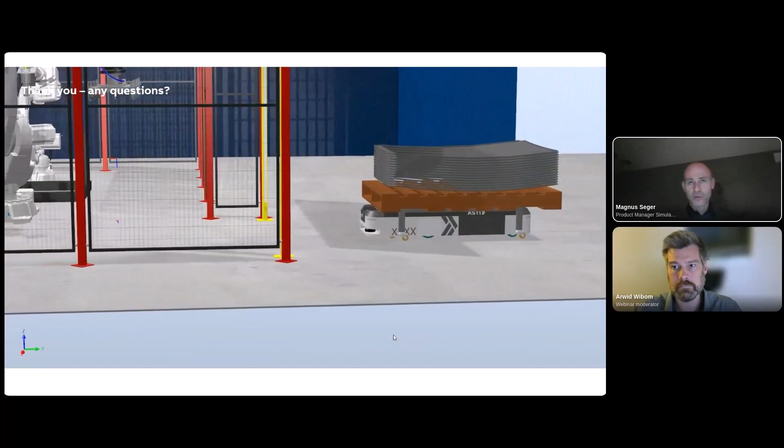Let me understand the question—whether you want to run it in the virtual controller. Let's elaborate a bit: right now we plan it and run it offline, as a service inside RobotStudio. But we're thinking about how to use this type of functionality later, maybe doing the planning a little tighter to the robot itself. You'd configure everything in RobotStudio, but to use this next to the robot, take sensor data, and let the robot plan by itself—that's super interesting. The collision-free automatic path planning has those capabilities. I'll leave it at that, but you can envision a bit what we're driving towards and how our thought process is on this.

And then we have a feature request: control and mouse click on procedures and function names in the code editor should move the cursor to the definition, the same way it works in Visual Studio. Interesting, that's a good one. Thanks, makes a lot of sense.

Is there a specific robot you recommend for use in a meat packaging application? My customer bought a Fanuc that was advertised as washdown rated, but I had to replace it because apparently it wasn't.

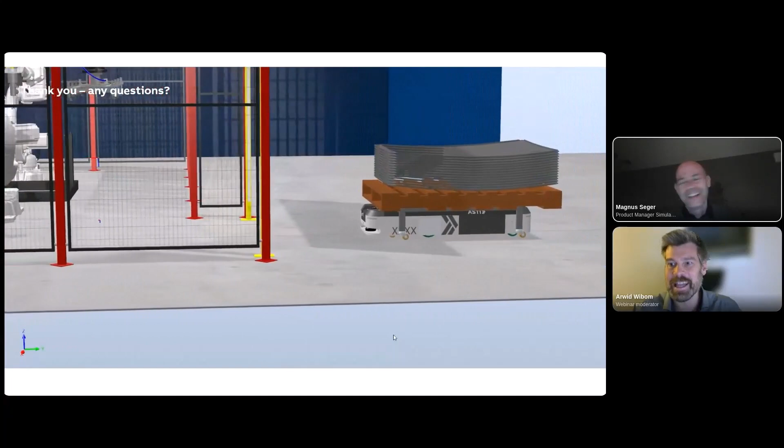I think they landed—I'll tell you, you should not go for the Fanuc, that's of course how you should do it. No, but we have a lot of graded robots as well. I'm not an expert in these areas—you have to talk with your local business units who really are experts in which robot to use and which have the right ratings in terms of IP protection, etc. So I won't jump into that topic, but good suggestion. Go for the ABB, that's a good one. Yeah, that's always the answer, right? Exactly.

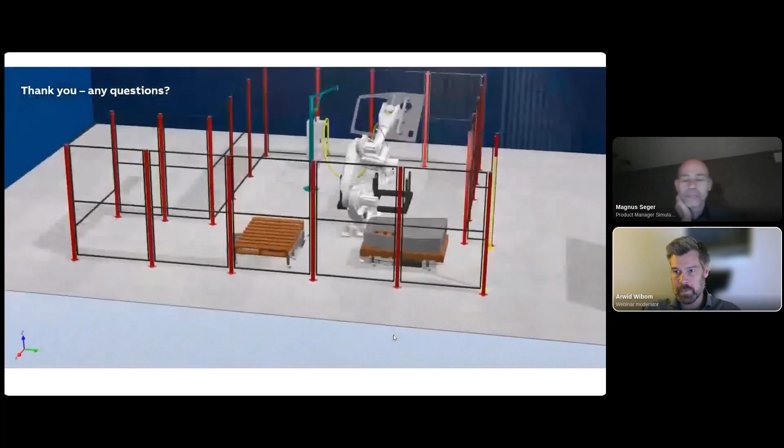Moving along, visualizing world zones would be nice, and has been on the wish list for some time. Any plans? Yes, it's one of the top things for next year. It has always been on our top list. That was something we had before Safe Move, to be able to edit, program, and visualize inside RobotStudio. So that's one of my top priorities for next year. Maybe I promised too much, but I really would like to see it during next year. For me, it's just a no-brainer to have it.

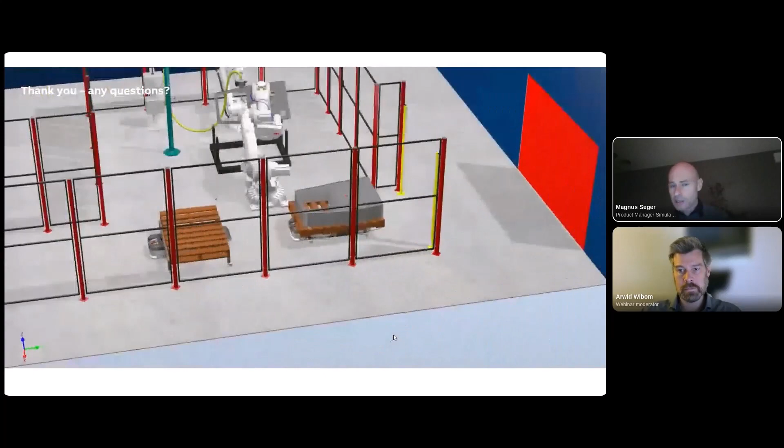Is there a plan to integrate the PickMaster Twin Power Pack into RobotStudio, similar to the PickMaster 3 picking Power Pack? No, I don't think so. It's still based as a power pack on top of RobotStudio, but it also has a runtime design and runtime component. I'm not an expert in PickMaster Twin, but you do a lot of configuration using RobotStudio to set everything up, so it is integrated in that sense. You do the design in RobotStudio, but then there's a runtime that runs next to the robot with different recipes and so forth. I don't think that will change to not using RobotStudio, but I won't go too deep since I'm not an expert in that area.

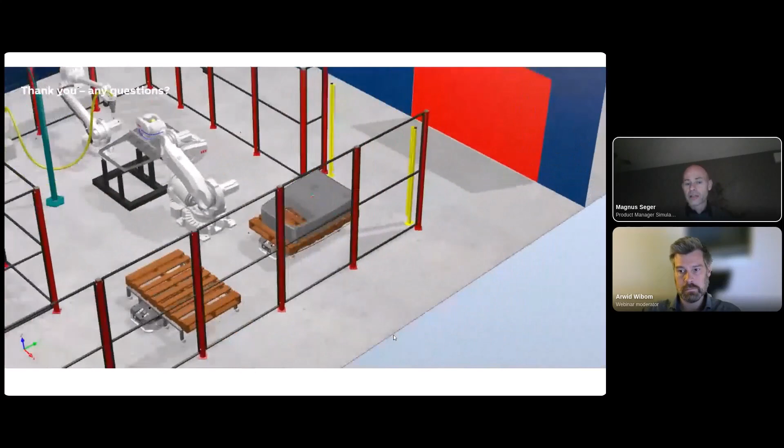Is there a training or course certification available for students to get knowledge about RobotStudio? No, but there are some classes you can take, including some getting-started classes and a package you can find on our website to get going. So there are a lot of different classes you can use to get started. But we don't have any formal certifications for RobotStudio, which is something we're actually looking into, since I get asked a lot how to get certified in RobotStudio. ABB has what we call universities where you can get this type of training - quite intense and broad - and you can get certified through them, but they're in different countries, and we don't have a web-based way to do it like this. It's something we'd really like to include. We talk a lot about it, but haven't come up with a good solution yet. There are a lot of thoughts in that direction because we'd like to see people getting certified in RobotStudio.

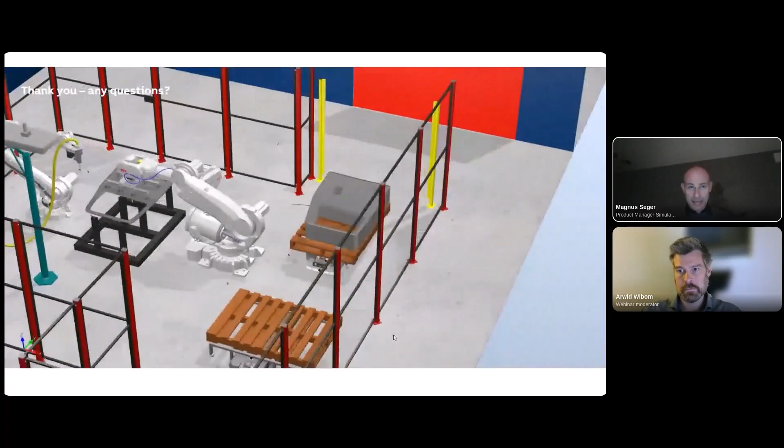Is there a possibility to use the automatic path planning feature with a dynamic update of the environment, collision geometries based on a 3D point cloud? Yes, we can merge a hybrid of both the static view and a snapshot taken from a sensor - mesh or point cloud - and combine that to do a new collision-free path planning. We can already do that today, so we can have a mixed or hybrid environment for planning. That means you take a snapshot of the environment, see how the layout or scene looks right now, and I can do the planning and give you the trajectories. So that's already possible today with this mixed approach. Right now what you're seeing is static, everything fixed, but we can do that as well with automatic path planning.

There's some feedback here that the collision-free path looks really amazing.

Can we connect this to our own GitHub or GitLab repo? No, not today. We are using our own Git repo stored and running in the cloud, so we cannot do that as we speak today. There have, of course, been a lot of discussions about whether you can point to another Git repo, but so far, no, we cannot do it. We only run in our cloud with our setup of the Git repos.

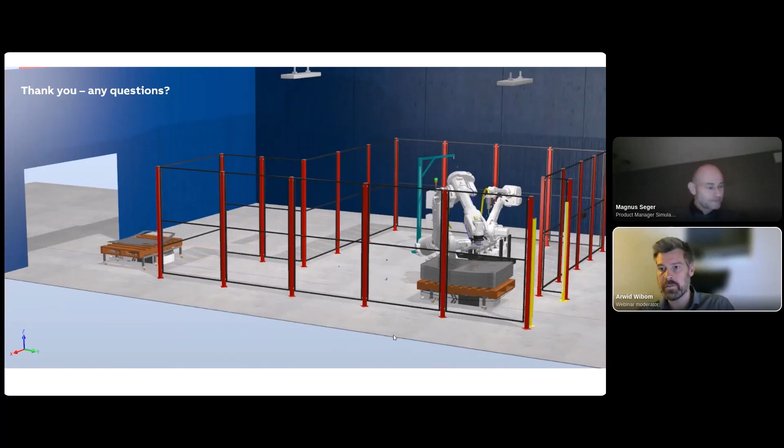There's also a question about if it's possible to share a file from the cloud with people who don't have a license of RobotStudio. Yep, so the share recording that we saw visualized, you don't need to have any licenses for that. It's just a link that you get to your mail. You click on that link and it takes you to a web browser, and you don't have to have any license or anything installed in RobotStudio. It's just a link. So yes, that is free to use for anyone.

Let's see here, trying to find... there's perhaps more of an OmniCore question, but we'll touch upon it anyways.

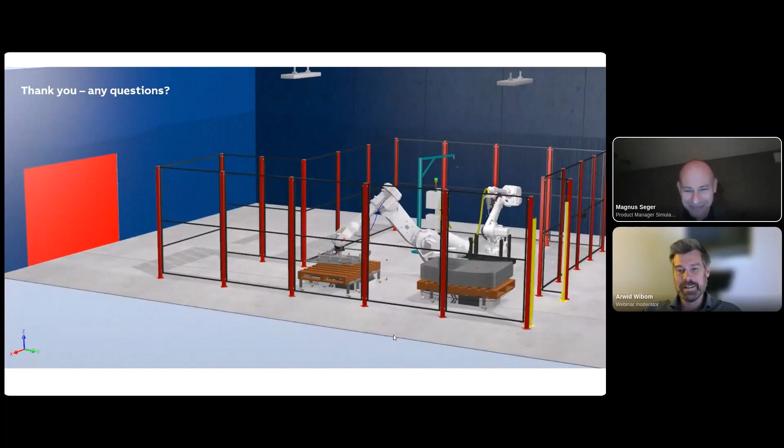When can we expect to have Omnicore supporting multi-move? I don't know, that's my answer. I will not say anything about the Omnicore, unfortunately. I leave that to the other guys that are responsible for that, and we'll make sure we get some information. We'll get in touch with Peter who runs it. I think it's much better to talk to Peter Fixell instead. Let him answer that.

When we create a box geometry in modeling, is there a way we can change the dimensions once it's created?

Both yes and no. The ones that you import are static, they're solids, but we also have parametric boxes as smart components that you can use. The ones you import are static - yes, you can scale them, put different scales, but we don't have parametric models like in CAD tools. There are ways to tweak around a little bit, so we can do it as smart components that can be parametric, or scale them differently. So there are workarounds, but maybe not the thing you think of or refer to.

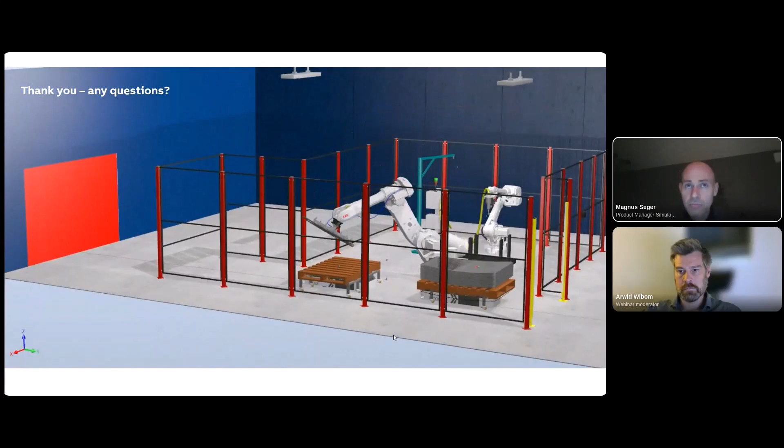Perfect, thank you. I'm trying to look through here if there's... it's not that easy to cover everything. Yeah, it's been - people like the questions, they tend to move around in the chat as well. So, but there's one here that we haven't covered.

Can you please show the demo of the AR Viewer app, if possible?

Yep, let's have that in mind for the next webinar, so that means you have to come to the next one - we can definitely do that. As I said, we have a lot of things planned for the AR viewer for next year, which will be super interesting. There are a few things on the website where you can find and see how it works, and it's kind of intuitive. So please, just start downloading it first. You have all instructions on the website. Download it, play around with some of the sample solutions that we have there. You can upload new things from RobotStudio to visualize it. It's kind of self-explanatory, but more will come next year, so stay tuned. As you saw, we will bring it more tightly to our cloud ecosystem as well. But I think you'll be able to test it by yourself a lot.

But I like it, good point. It's almost like we planned this as a cliffhanger for our next webinar. That's how it is. Yeah, exactly, more to come soon. I always say soon, more.